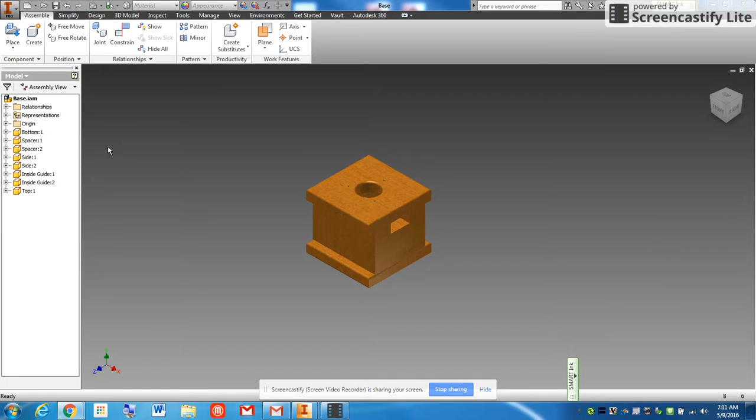So to begin, I'm going to go up to Place and find where I saved my slider assembly. In previous screencasts, you should have been able to put the slider together. So I'm going to put my slider into this assembly and click OK.

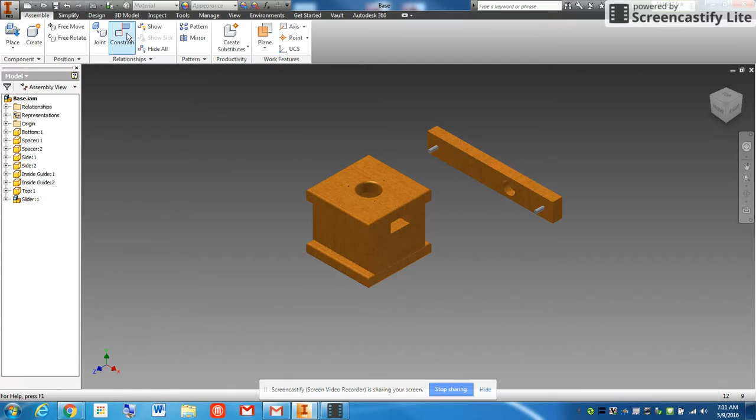And I'm going to start constraining that. The slider needs two constraints. I'm going to constrain the side of my slider to the inside of this guide. Click apply, then cancel that constraint, and pull this thing out.

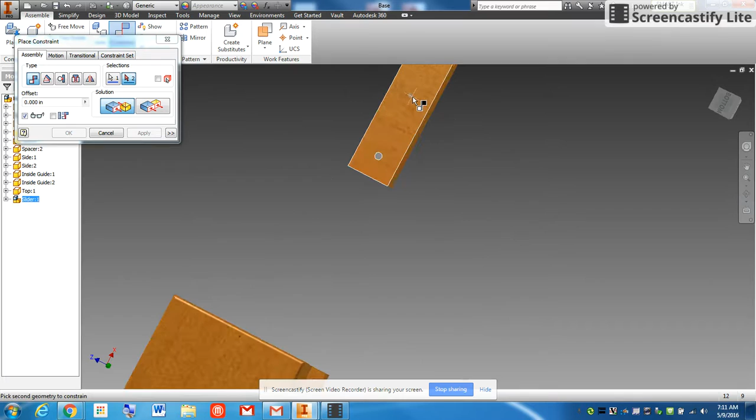I'm going to constrain this part of the slider. I'm going to rotate around, then constrain that to the bottom of my slider. Click apply, go back home.

And now, when I look at it, my slider does slide through my base, and that's what we're looking for. Alright, so the slider slides.

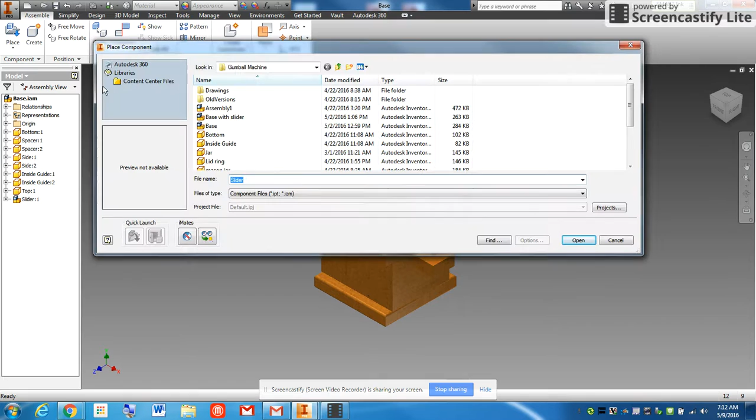Then I'm going to go back to Place. I'm going to find my lid ring, place the lid ring, and I'm also going to place the mason jar. Make sure you get the mason jar in there, both of those. Click OK. I'm going to constrain the lid ring first.

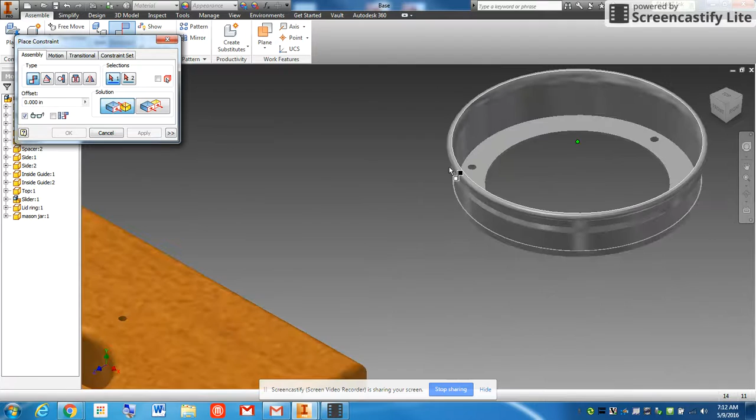Now the key with the lid ring: there's these little holes on the lid ring, and little holes on the base. I'm going to zoom into that hole. Now you see how I get this dotted line here? That dotted line, this line right here, is called a center line. So I'm going to click on that.

And I'm going to find that same line on one of these holes. Constrain, I'm going to apply that constraint, then cancel it. I'm going to see if I can move my ring.

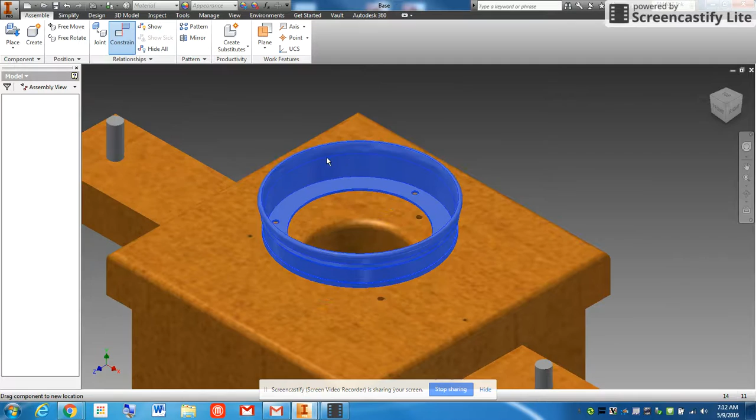I still can. I'm going to slide it over a little bit. I'm going to find, again, the center line here, as well as a center line here. Click apply, and now it should just move up and down.

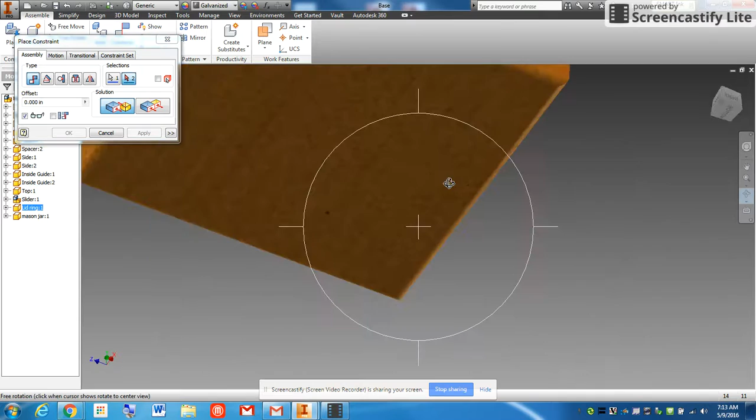To tie that thing down, we have to click constrain, and I'm going to mate my base. I'm going to rotate around to the bottom of my jar lid, this surface right here. So I'm going to glue that down, click apply. I'll go back home, and now the jar ring, or lid ring, should be constrained.

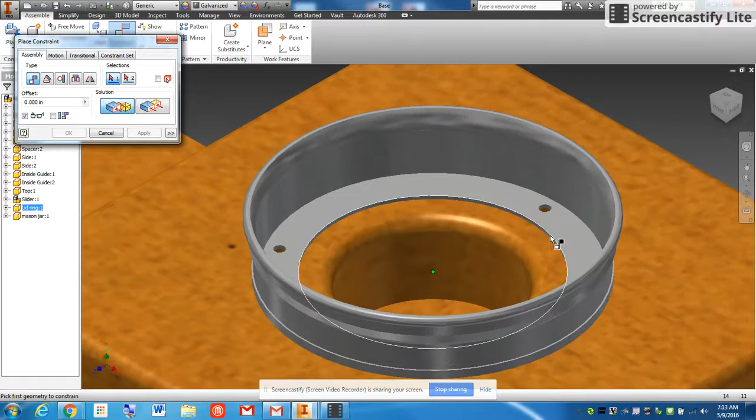Then to constrain the jar, it's pretty easy. I'm going to find the center line of one of these. Right now I'm kind of in between those two surfaces, and I have the center line. So I'm going to click that center axis, and find the center axis of my jar. Click apply, I'm going to cancel that, and then slide my jar up.

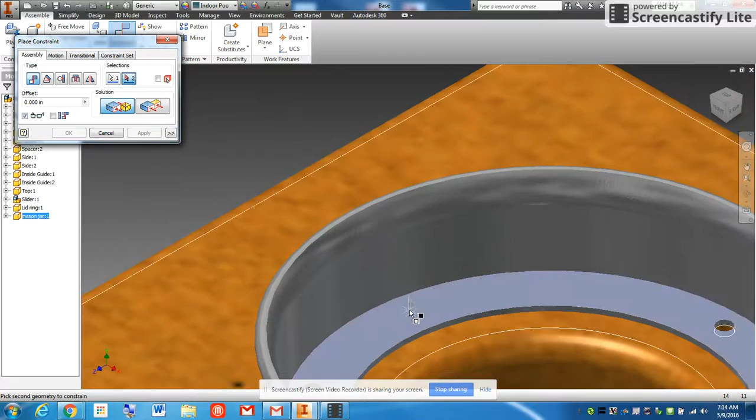And now I'm going to constrain the bottom, this surface of the lid ring. I will spin around and find a flat surface on the bottom of my jar. Click apply, go back home. And now my jar is attached on there, and my slider slides, and my gumball machine is complete.